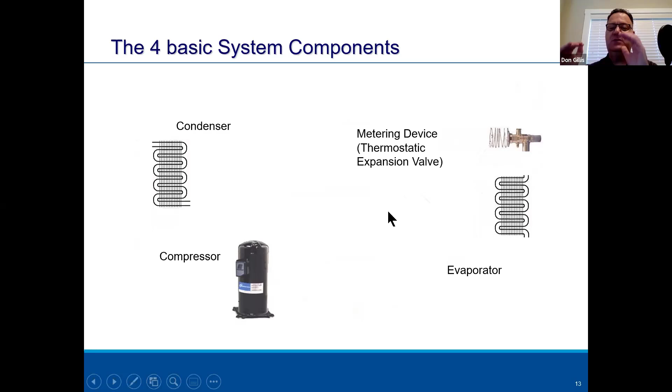And that's the way I like to look at the TXV. It's actually stopping that pressure drop, pushing back on the compressor, and it's able to balance, keep that pressure up for us to change the state, okay?

Now, this is the way I was taught years ago. I stole this off of the internet, but you can find this anywhere. I did this for a fun fact recently, and I got a lot of positive feedback, they never heard of it, even from instructors. But 7 years ago, my first vocational school, this is the way my trainer taught us. He made it a sports analogy. I like to do sports analogies. In this case, I'm going to use the baseball sports analogy, okay?

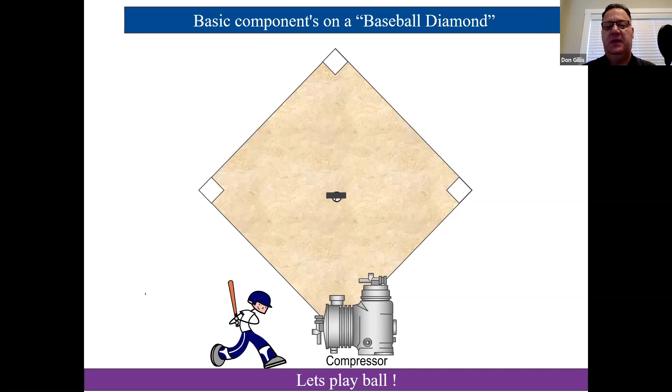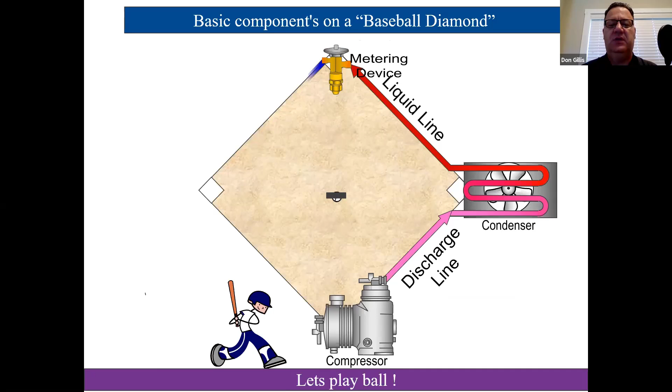And what he said was, Don, when you're out in the system, no matter how large it is, first of all, identify those four components and think of it as a baseball diamond. His name was Jeff, and he said, think of the home plate as a compressor and think of the first base as a condenser. And as you round first base and head for second base, think of that as a metering device. And when you round third, think of that as the evaporator, and then you're coming on home.

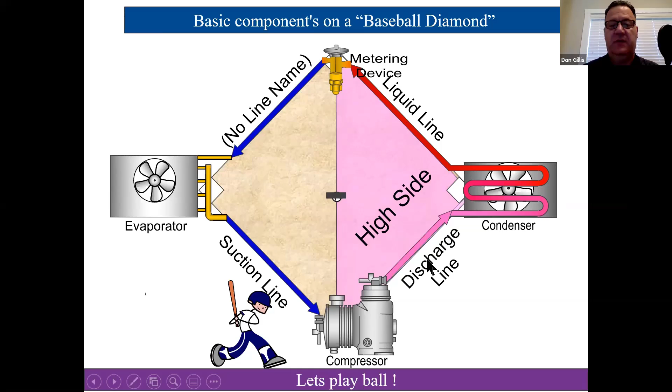But what he was really trying to tell me is not only what's inside that line, high pressure vapor, high pressure liquid, low pressure liquid, and low pressure vapor. What he really was telling me is, on this side of that pitcher's mound, over by the first base, everything over there is high pressure, whether it's liquid or vapor. On the other side, whether it's liquid or vapor, it's low pressure.

Okay, so that's a nice way for young men, young women coming out of the vocational schools or maybe on the job training to get a good visual of what's going on. And you can use any sport for this. I just chose the baseball field.

The thing I want to add here that this doesn't have, if you were to draw an imaginary line from third base or the evaporator to first base or the condenser, above that pitcher's mound everything would be liquid and everything below it would be vapor, whether it's high pressure or low pressure. This wasn't in our books when I first hired in, and they added the baseball diamond theory after because they thought it was a great way to teach.

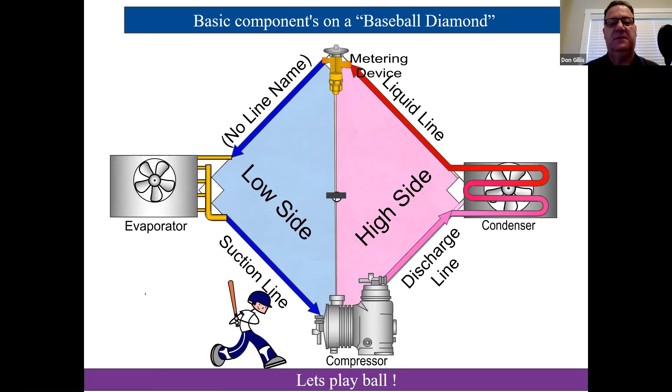So let's talk about refrigerant fundamentals. Refrigerant is a chemical compound which is capable of changing its state from liquid, vapor, and liquid while maintaining a chemical stability. And that's a fancy way of saying all day, every day, in some cases 365 days a year, we're going from liquid, vapor, back and forth, okay?

Now, the reason I want to point that out to you, unlike a car that has motor oil that you need to change every 3,000, 5,000 miles, in a perfect world, which we know it's not, you should never have to touch that refrigerant again. It's not until Don or someone like me comes up and puts long hoses on it or exposes it to air or contaminates it that we have trouble, okay? So that's the thing about refrigerants.

They don't just pluck them out of the sky. Really, almost all liquids on the face of the earth are refrigerant. Water is a refrigerant. It actually has a number. It's referred to as R718, and we use it in boilers and chillers and those kind of things.

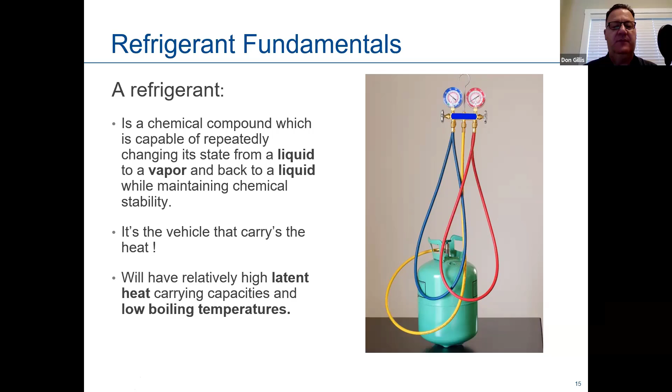And then last but not least, we need a relatively high latent heat. Now, if you were to Google latent, okay, you would see the word hidden. It's hidden heat, okay? And then we have a very low boiling temperature. For example, water boils at 212 degrees at atmospheric pressure, okay? But it has to have those two capabilities.

And this is a nice little graph. I know it's busy. I know it looks complex, but I'm going to try to do my best to give an analogy here that I use in classroom every time I teach this. And this is for beginners, the first 2-year students type things. So it's first of all, sensible heat. And these are important things to know in the field, because even though I'm going to talk about water and a pot of boiling water on your stove, it's the basics of what we do every day in the field, okay? It is your air conditioner, okay?

Sensible heat, first of all, it's just like it says. It senses. You can sense it. You can feel a difference in heat. Your thermostat senses sensible heat. You have it set for 70. It goes to 71. It senses that and it turns on. Okay. On the other hand, latent is heat that stays the same. It doesn't change temperature, but it's changing state.

And my example here is, if you were to put a pot of water on your stove tonight, and I used to do this all the time with my kids or my wife when I learned something, I'd say, hey, check this out. So I often tell our students, go home tonight, put a pot of water on your stove and start boiling it, and put a temperature probe in it. When that water starts to boil at atmospheric pressure, which is 14.7, by the way, it's standard atmospheric pressure, unless you go to Denver and they let you know about it right away. But water will start to boil at 212 degrees.

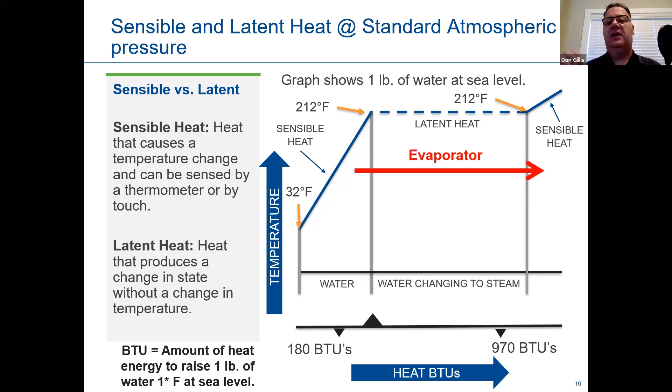What's cool about latent heat, and I'm a geek, is as long as there's water in that pot, it'll stay 212 degrees. It's amazing. It's physics, but it's kind of cool if you think about it. And that's what we refer to as latent heat, okay? That also is our evaporator. The second that last drop of water leaves that pot and it's all vapor, it'll go to 213 degrees. And right beyond that last arrow, that 213 degrees is what's leaving the evaporator. That's also known as 1 degree of superheat, okay? It's 1 degree of sensible heat and 1 degree of superheat. And I know that's not a lot of fun, but it's a nice way to look at our industry.

And going back the other way is the condenser. So in the condenser and the evaporator, we're changing state of the refrigerant. In the evaporator, we're going from liquid to vapor. In the condenser, we're going from vapor to liquid, okay? And that's what it's doing. The outside's going from vapor to liquid. The inside's going from liquid to vapor. The evaporator is absorbing the heat. The condenser is rejecting it outside, your air conditioner, okay?

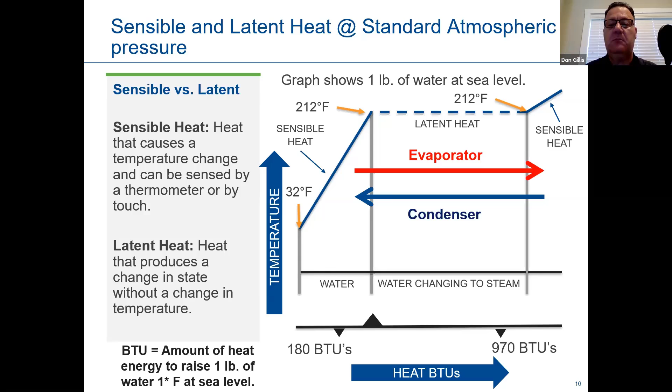So the only thing I want you to take away from this is refrigerant piping. The two biggest reasons we have refrigerant piping, the easiest way to remember this, for me, when I first got started, the two biggest ones that you need to know are the V's. The two V's, as in Victor, okay? We need volume and we need velocity, okay?

So in other words, if one of your employees or coworkers or customers goes out to hook up a refrigerant line and you just sold them a condenser, if those refrigerant lines aren't right, something's going to go seriously wrong. We need volume. In other words, we need the refrigerant line to be big enough to bring back refrigerant to cool our compressor. Remember, I said most compressors out there are refrigerant cooled. 90% of them are. Okay, so we need it to be large enough for volume to cool the compressor.

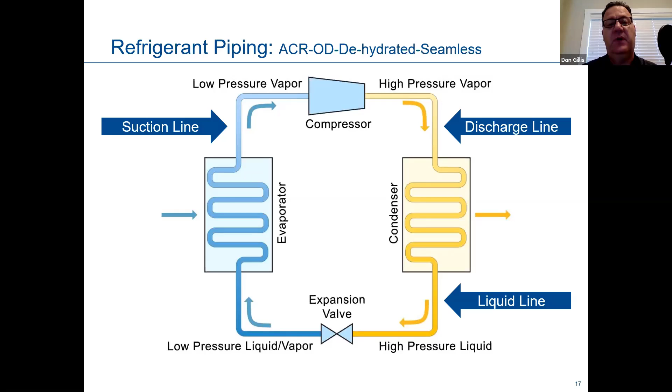We need it to be small enough to push the oil back for that velocity. Okay, so those are the two biggest reasons we size refrigerant lines like we do. And if you work for a wholesaler, you know that on your charts, if you get beyond a certain footage, like beyond 50 feet or 70 feet or something, those sizes might change because now we've got further to go.

This is just a real quick one. I don't want to scare you here on it, and I don't know everybody's level and who all does what, but I like showing this in the classroom. Just to start getting people to understand this, I always want people to be able to improve themselves and move up the ladder, and hopefully one day become that service manager or that lead technician or whatever. So this is an enthalpy chart. I'm not going to spend a lot of time on it, but when I showed it the first time, I saw a lot of eyes open from technicians, and sometimes they come in the room like they know it all already, and it really helps break down that barrier because they don't know this.

But this is an enthalpy chart, and this is what people that design systems do. Now, I don't want to teach you enthalpy, but if you ever see a diagram like this, I want you to understand how simple this is, okay? In this particular diagram, I put the compressor and the actual symbols in there. This line normally wouldn't say compressor, but this line is showing you the compressor. The line going across here is the condenser, the line going down is the metering device, and the line going across is the evaporator.

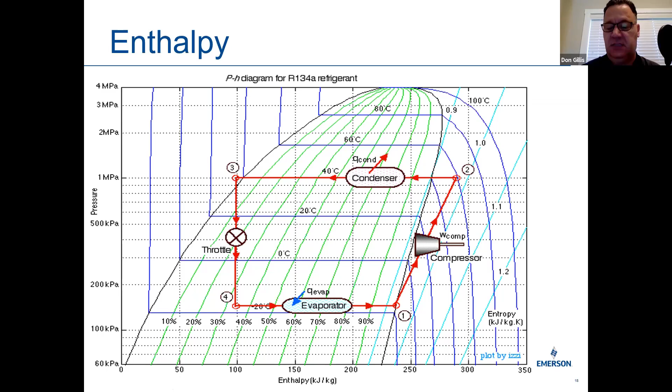Real quick, this is called a saturated curve inside here. In very simple terms, everything that's inside that thumbnail looking thing is refrigerant mixed with liquid and vapor, okay? And that's what's in our condensers and our evaporator. It's saturated refrigerant, changing from liquid to vapor or vice versa. So as long as it's inside there, it is saturated. It gets over here, it's liquid. It gets over here, it's vapor. At the bottom, we have BTUs, and at the side, we have pressures. That's how people design the equipment you work on, whether it's Trane, Goodman, whatever it is.

Okay, real quick, I didn't realize I left this in here. What is sensible heat? It's heat you can measure. Any heat that you can measure or sense, it's sensible, okay? What is standard atmospheric pressure? 14.7, okay? That's the pressure that's already pushing down on us. When our gauges are at 0 on our refrigerants, that 14.7 is already figured in, okay?

All right, what type of piping do we use? We use ACR pipe, air conditioning refrigerant pipe. The reason that's important for technicians to know is it's not like plumber's pipe. Air conditioning pipe is dehydrated, it doesn't have a seam, and it's measured by OD and not ID, okay? The evaporator refrigerant state is saturated, as I talked about, and the refrigerant number for water happens to be R718. ACR piping is different than plumbing copper; name just 2 differences. Refrigerant copper is dehydrated, it's seamless, and it's measured in OD.

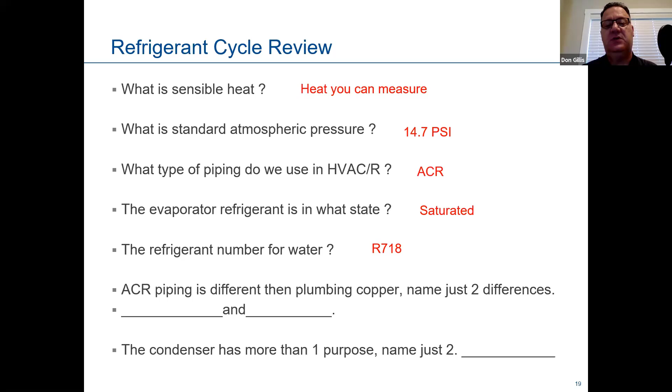The condenser has more than one purpose. Name just 2. Well, it's rejecting heat, and it's condensing the refrigerant. In other words, when it rejects the heat, it's causing it to condense, and it goes from a vapor to a liquid, okay? Let's go over some of the best practices on refrigerant. The way I put this together is it's going to be somewhat walking us through an install.

So if you already work with technicians, or you sell to technicians, or you manage technicians, or whatever that looks like, when they're going down to put an air conditioner in, this kind of looks like what their day looks like, okay? A little bit, all right?

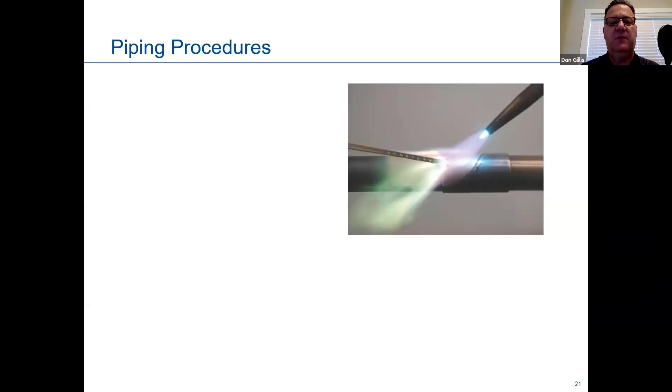So let's go over the piping procedures. They're brazing the unit in. We need the correct size of the piping, obviously. We talked about the type of tubing already. They've got to cut with the proper tools. We're talking about tubing cutters. We're not talking about hacksaws or Sawzalls. And I know that sounds funny, but you'd be surprised. And I make a joke of that because we're all guilty of it, okay? We want to make sure those little copper flakes don't fall down into the copper tubing.

Okay, clean and flux as needed. We need to clean the copper. Flux is just a salve, if you will. The only thing I tell the students about flux is it almost looks like Vaseline. It helps it seal better. It's got some solder already in it, typically, and it brings heat quicker to that area and helps the brazing go a lot smoother. The only thing I warn them about flux is it's acidic. So we always tell them to use it sparingly and put it on the male fitting, and don't glob it up in the female fitting where you can shove it down the line, okay?

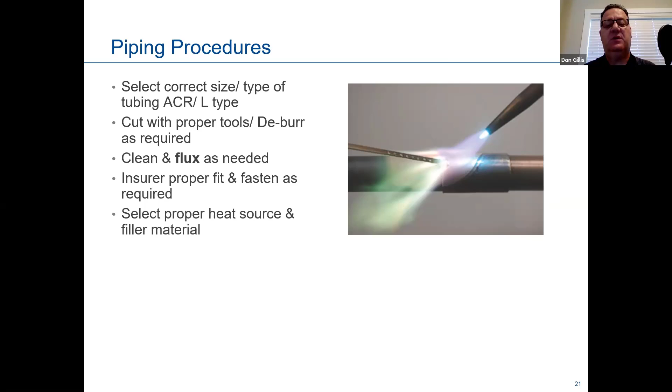Ensure proper fit and fasten as required. Obviously, follow all codes and regulations, okay? Select the proper heat source and filler material. When we talk about heat source, we've got the Turbotorches, and I know that's a brand name. They're a one-tank deal. They don't get as hot as oxy-acetylene. So you have to be very aware of technicians not staying on the part too long, because that's how new things get burned up or broke real quick, and you think it came bad from the factory when in fact it did not. And I'm talking about TXVs, service valves. That brass likes to expand because of that heat, like anything else, okay? So when it expands, you might not be able to open that valve anymore, that TXV might not be able to work.

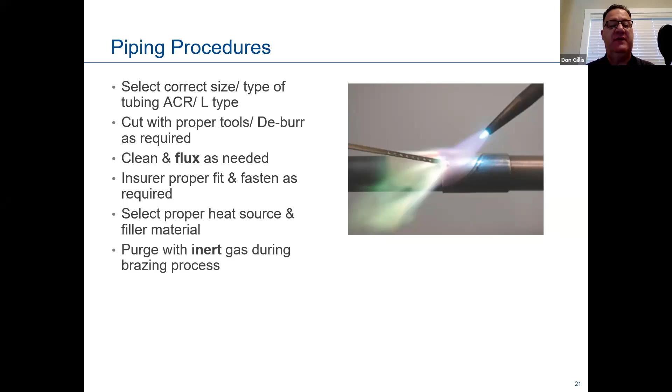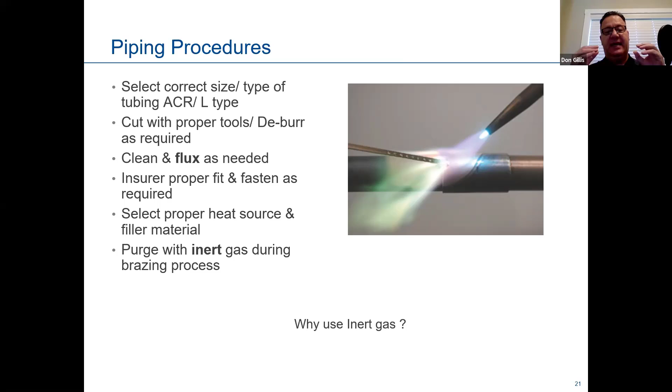Purge with inert gas. This is always a good one because a lot of guys and gals don't even realize this. And inert gas is just a fancy way of saying nitrogen. Anything that can dry the system out. We're going to put inert gas in there. Why use inert gas? As I just said, we're dehydrating it. There's moisture in there. Moisture is bad for refrigerant, especially POE oil. It turns acidic. So we have to be careful about it. We need to dry it out.

Now, what does brazing with nitrogen look like? Because a lot of technicians don't do it, more are getting used to it, but you really need to get in the practice of it. When you braze the line set into your refrigerant lines, you remove the Schrader valves from the condenser or your air conditioner. Refrigerant hasn't been released yet. And then you just open up a nitrogen tank with the hoses while you're brazing, just a little bit at a time, maybe a pound, pound and a half, if that, okay? So you're just basically not letting that oxidize inside that copper.

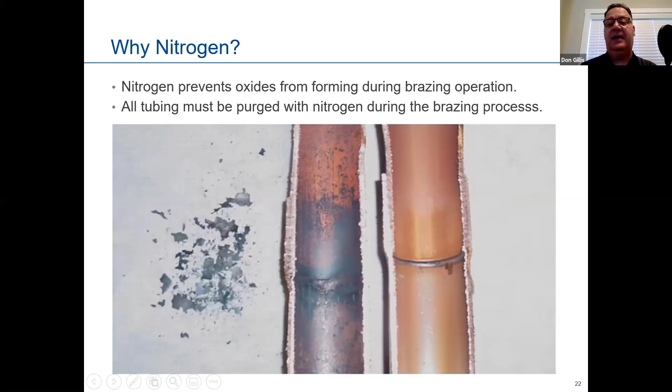And the homeowner or the building owner goes, gosh, they just don't make things like they used to, after he tells them the compressor failed or the TXV failed. Well, the fact is they do still make things fairly good, really good. It's just some of our practices have changed. And POE oil really, really changed the industry. And that's about all that's in refrigerant now, okay? When 410A came along, POE oil took over.

Okay, just real quick on pressure tests. We're pressure testing the system, and I'm not going to bore you with all this. We never want them to go above the nameplate on their evaporator to explode it, obviously. I'm not sure if you're familiar. I'm sure most of you are. We're going to use soap bubbles. Literally, it's identical to dish soap that you use. I've used dish soap before.

You mix it with water, about a 1-to-3 ratio, and you can put those soap bubbles on. It makes it thick over the fittings, which you just brazed. You pressurize that system with nitrogen, and it'll blow bubbles out wherever you might have a leak. So that's just a good visual of what they're doing when they first install the system. At the bottom, you also see some other types of detectors. One's based on sound, and the other one is a sniffer that can actually smell the refrigerant and starts beeping, almost like a CO detector in your house.

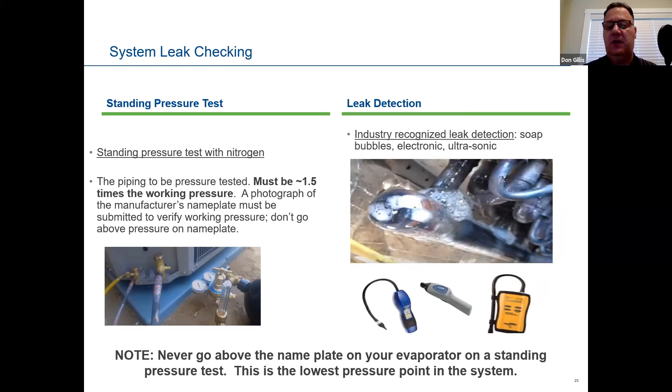Evacuation, we're going to use an evacuation pump. The biggest takeaway I want to give you there is we use evacuation to remove non-condensables and moisture. And when I say moisture, that vacuum pump is vacuuming, bringing that pressure down. It's not 14.7 anymore in those refrigerant lines where water boils at 212 degrees. We're pulling it down. For example, we like to get things down to 500 microns. That's a fancy way of saying like a -30 on your gauges, okay? And at 500 microns, you're boiling water at -12.

I did a little display the other day on my fun facts, I put it on LinkedIn too, and it got a lot of hits. All we were doing when I was teaching in Pennsylvania last week is vacuuming. We were hooked up to a mason jar of water with the vacuum pump, and it showed the water just boiling in there. And it definitely wasn't 212 degrees. You could touch the jar, but anytime you're pulling that down to a different pressure, water's going to boil

at a different temperature. Just like out in Boulder, Colorado, or Denver, Colorado. I go out there quite a bit. I was there 3 times in 2 months, and they were quick to tell me that atmospheric pressure is not 14.7 there. It's 12.2, I believe.

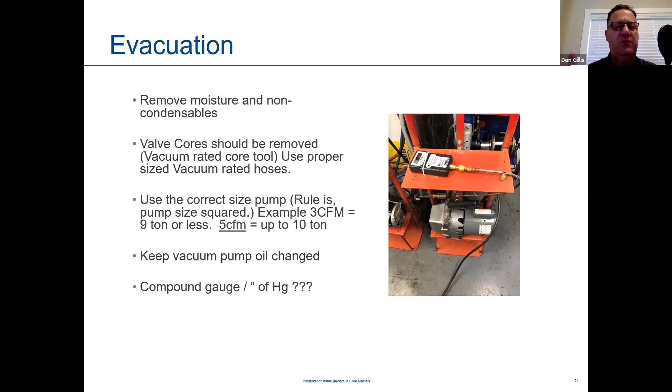Okay. The big one here that I want to talk about most importantly is change your vacuum pump oil. If you work with technicians, or you sell to technicians, or you supervise technicians, make sure they're changing their vacuum pump oil often, preferably every time. The vacuum pump oil will absorb the moisture that's coming through there. Like I jokingly say in the class all the time, don't be like Don. And this has happened to me, I'm just being honest. Don't be like Don and only change your oil when the vacuum pump tips over in your truck. Or if it's milky white, that's way too far.

You can have the best vacuum pump in the world, and within a month, it won't be pulling down worth a darn because you haven't changed the oil. So I'm not going to share with you about the different sizing. More importantly, change the oil. And last but not least, use a micron gauge. Mercury gauges or compound gauges or refrigerant gauges are not designed to pull down to a proper vacuum. They're 1/4-inch hoses. It does not work. They're not designed.

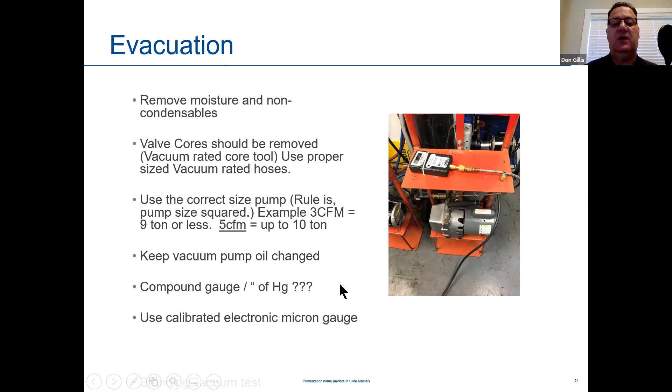You can have a 7 CFM vacuum pump, a nice fancy 10 CFM, and through 1/4-inch hoses, you're only really pulling down like 3 CFM. So it takes forever, and time is money. Okay. So get you some micron gauges and get you some micron hoses. Okay. Encourage that. This is just a nice snapshot of the gauges.

Did you know? Every one of those hash marks on these refrigerant gauges, these compound gauges or mercury gauges, is 2 inches. The reason I'm sharing that with you, did you know? Because I did not. Between every one of those hash marks is not only 2 inches, but it's also 50,800 microns. Why is that important? Why is that an eye opener to technicians when we teach?

Because close doesn't count. In between one of those hash marks, if it's beer 30 on Friday or lunchtime, or I got to go call my girlfriend or my boyfriend or whatever. Getting close does not count, because if you're off just half of a hash mark, you've got 25,400 microns. And what did we say we want? What Emerson recommends? 500 microns or less. If you are not there, you're not tight and you're not dry. Use calibrated gauges.

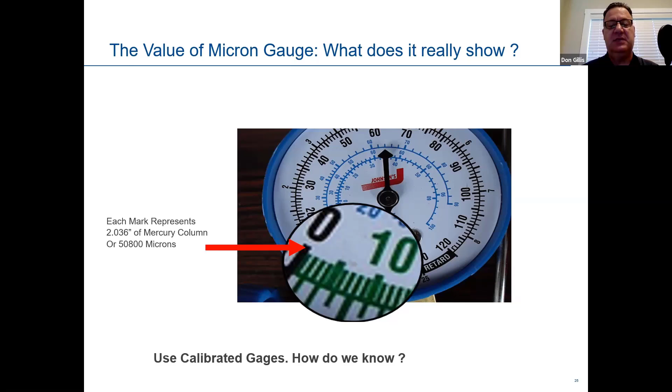Refrigerant charging. If you're using a blend, which most refrigerants out there are a blend, we ask you to turn the tank upside down. So in other words, where the Schrader valve is on top of the tank, it will be down. Why is that important to know? Because we charge in a liquid. Blends might have 2 or more components. It's like a recipe, if you will. It's like you're making chili or soup, so you're putting all these ingredients in. That's what a blend is. It has 4 or 5 components, different refrigerants to make one refrigerant.

So we want to put that in a liquid state, turning the tank upside down, because if we put it in vapor state, we have a great possibility of getting a pocket of this vapor and this vapor, and it's not a good mix. So whenever we're using a blend, we put it in the liquid side. The unit's not running now. We charge the unit. We haven't released the refrigerant in your condenser at your house. Brand new system for Mrs. Jones. The valves are still closed.

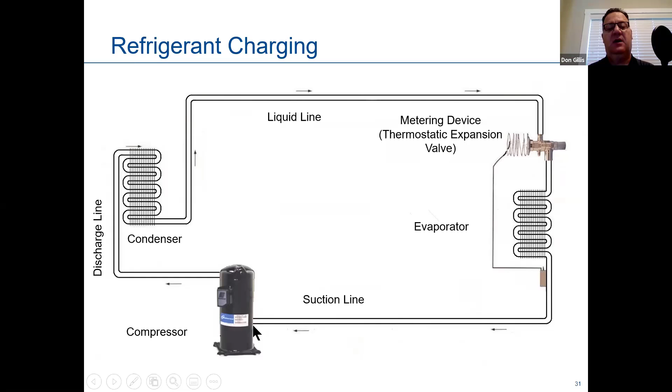Typically, and I say typically because nothing's set in stone, your air conditioner at your house, when you first get it, comes with about 15 foot of charge in it. So if this line set is longer than 15 foot, a technician should and will charge the system with a little bit more. It might only need a pound or so, but we're putting that in a liquid state, coming in the liquid line side, and we're weighing that in with the tank upside down like this. Best practices, again, initial charge, liquid, high side.

Topping off: if it is a single component like R22, you can top off that with vapor. Again, remove blends from the cylinder as a liquid. Use charging charts. When we're talking about charging charts, we're talking about PT charts. But if you don't know this, your gauges are PT charts. Those numbers in there, that's what the temperature is inside the evaporator or the condenser. It's just matching the pressure with the temperature.

My most important thing that I preach is verify airflow across the evaporator and the condenser. If you go out to your air conditioner and you see a bunch of grass clippings or tall grass or ornamental grass growing up around it, that is terribly bad on your air conditioner. It has to breathe. Remember, it's pulling air in from the side and rejecting that heat at the top. The further away you can keep anything around there, including your house, the better that thing will breathe.

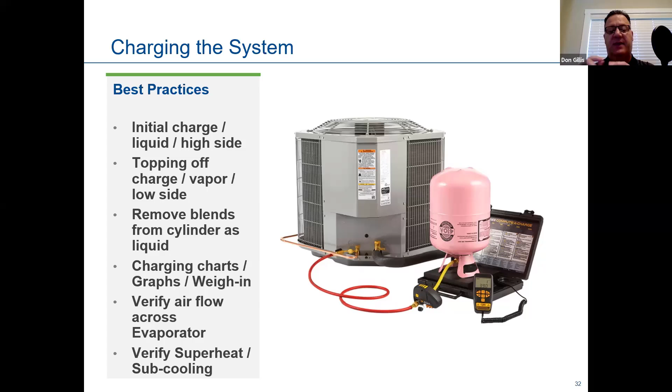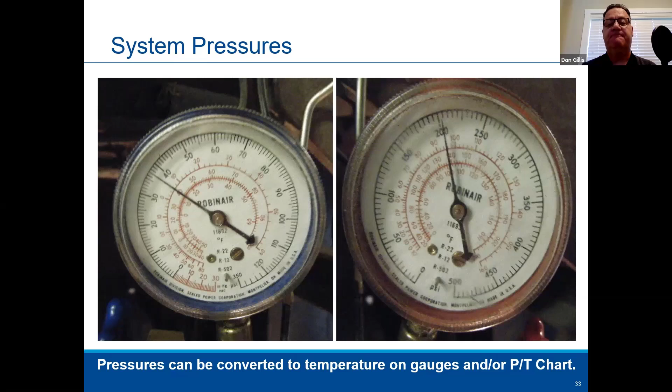Vapor or superheat, by the way, is any vapor above its boiling point. So for the example of water at 212, any heat added to a vapor above its boiling point, in water's case, that would be 213. That's 1 degree of superheat. Anything below its boiling point, 211 in water, is subcooling. So if you're drinking a bottle of water right now, that's subcooled liquid, because at atmospheric pressure, water boils at 212. So anything below 212 is considered subcooled liquid, all right? This just shows you the PT chart. This is one of our apps here, okay?

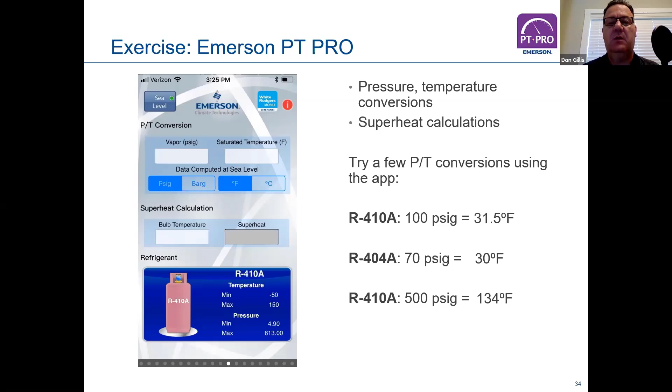All right, we have 3 different refrigerant conditions in a system. We have saturated, hopefully you remember what that is. It's vapor and liquid mixed, okay? It's both, all right? Where would we find saturated refrigerant? We'd find them in our coils, okay? Evaporator inside and the condenser outside at the air conditioner, okay?

Superheated refrigerant, that's any vapor above its boiling point, heat added to it, okay? So I always use water as the example because it's a good analogy, and it's 213 degrees. So that's 1 degree of sensible heat. It's also 1 degree of superheat. Subcooled is always heat removed from a liquid below its boiling point. In the case of water, or R718, it'd be 211 degrees, okay?

Now, which one of those refrigerants do you think transfers heat better? Is it liquid or vapor? And typically at this time in the morning, I get people kind of hesitant because no one's talking yet. And then finally, what is it, vapor or liquid? And you might get 1 or 2 or 3 hands go up, more of them and more of them. Okay, let's do it this way. How many people think it's vapor? And you'll get, let's say it's a class of 24, 10 of them saying it's vapor, and 14 of them saying it's liquid. And then I give them a visual.

The way I was taught, the best analogy I've ever heard, I tell them, think about this. You have to sleep outside for 24 hours. It's 60-degree air temperature outside. You can wear whatever you want to, shirt, short sleeves, long sleeves, pants, shorts, whatever. Will you survive in 60-degree air? And the answer is yes.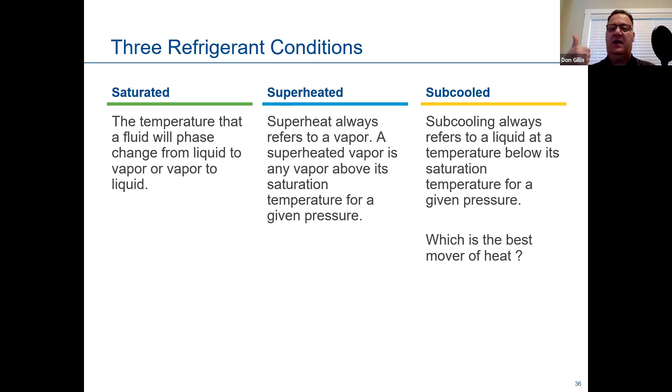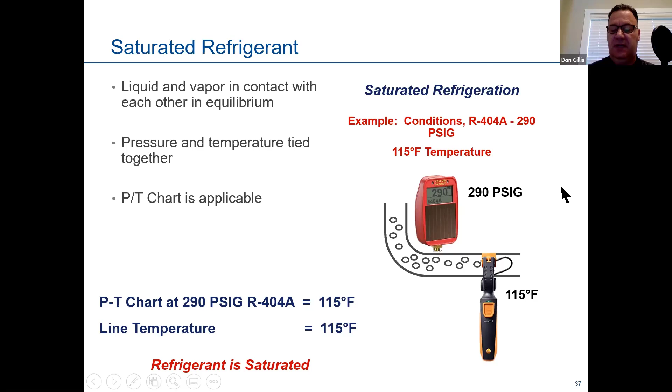The moral of this story, everything in that refrigerant line is in fact saturated, okay? Where would we find saturated refrigerant? We would find it in the evaporator and the condenser. On the evaporator, we're going from a liquid to a vapor, absorbing heat inside the house or the building. Out here, we're going from a vapor to a liquid. As we reject the heat, we're condensing that refrigerant from a vapor back to a liquid, okay?

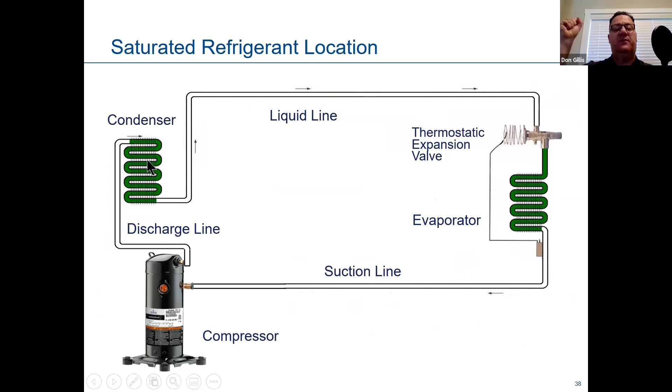Let's talk about superheat. Superheat, first and foremost, is a vapor. If they're looking for superheat anywhere else but the suction line, they're doing it wrong. And believe me, it happens all the time. When I was a service manager for 9.5 years in Fort Wayne, I trained a lot of people. I was blessed to work with a lot of good technicians, learned a lot from them, and hopefully I taught them some things.

And you'd be surprised. When I was first taught, I learned a lot, but the older guys that taught me, the age that I am now, I'd be looking over their shoulder like 26, 27 years ago, and I'd say, what should the gauges read? And they would say, well, on a temperature like today, we're looking at about 70 pounds. But to be honest with you, they weren't technically doing it correctly. They were just kind of ballparking it.

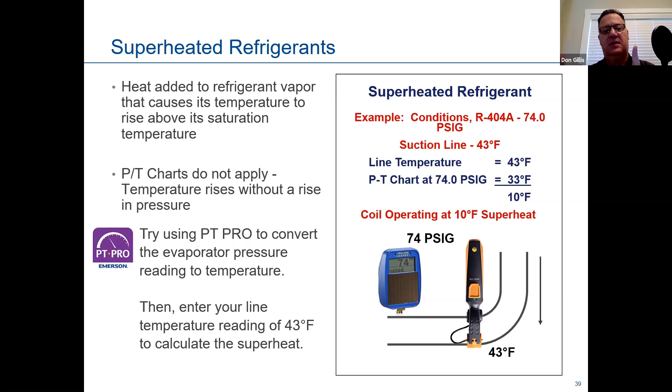But this is the right way to do it. You know what your gauges are telling you. Whatever that temperature is, just subtract whatever it's leaving, the evaporator or the condenser. So that's superheat. Now, where would we take superheat at? By the way, this is a TXV, if you didn't know that. This is our metering device. I'm sure you do. This is how this works, okay?

A TXV is metering the refrigerant as it's coming in. Remember, it's also a pressure drop. Without it, we wouldn't be able to build up pressure. Think of a little orifice, allowing so much refrigerant in. As it's coming through there, think of a spray bottle, a Windex bottle. That mist, atomized, that's what it's doing. It's changing from a liquid to a vapor, but it's mostly liquid when it leaves, and then it starts to absorb heat, and it turns to a vapor.

The real thing I want to point out is metering devices like this work so much better than a piston because there's a bulb over here reading the temperature of the refrigerant line leaving the evaporator. This is the TXV bulb. What's inside that TXV bulb? It could be any component. Sometimes it's the same refrigerant that's actually in the system.

What is it doing? When this refrigerant line gets hot, there is a pressure temperature relationship. The hotter it gets, the higher the pressure goes up. It expands that gas in that bulb. This line here has a little hole in it, and as it raises the temperature, it raises the pressure, and it pushes down on a diaphragm here. So if it's too hot leaving, it opens this TXV up more and allows more liquid refrigerant through, then it gets cool here and it adjusts all day like that, up and down. Think of it as a little diaphragm.

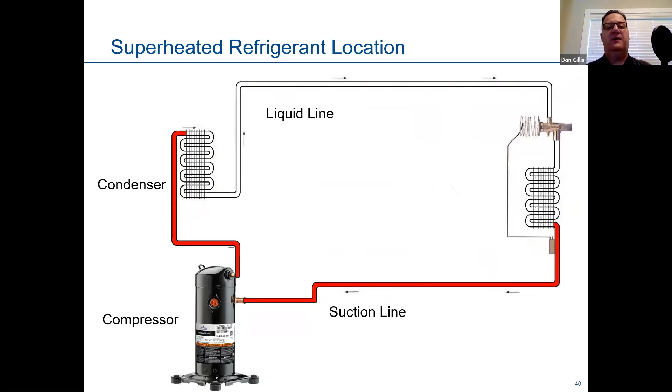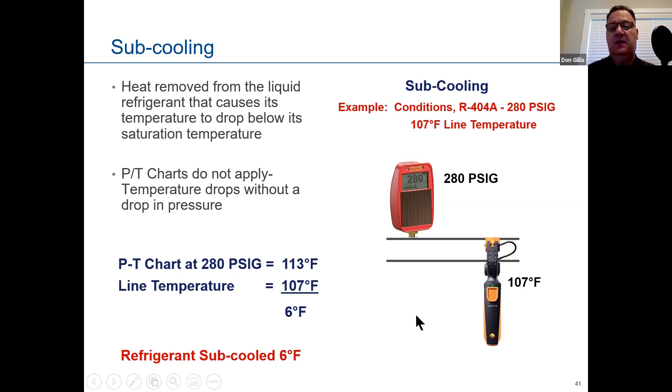The way I like to teach this is subcooling means the condenser. That's where we're changing vapor to liquid. Subcooling is a liquid, the same as superheat over here in the evaporator. So if we know the condenser is where subcooling happens, whatever our gauges say on our high side or red gauge is telling us the temperature about midpoint in that condenser. How do we do subcooling? We take the temperature leaving the condenser, subtract what's inside the condenser from our gauges, and that's our subcooling. It's that simple. If they're checking subcooling anywhere else but this line, they're doing it wrong.

And you'd be surprised. I've talked to technicians before as a service manager, and I finally say, where are you taking that temperature reading at? And I'm on the discharge line. Terminology sometimes can be confusing, whoever's training you. You have to be in the liquid line to be checking subcooling, okay?

I like to take readings here on subcooling on both ends, but I especially like to take it here also because it's as important to have liquid going into this TXV or this metering device as it is to have vapor going into our vapor pump, okay? Again, these two lines, remember home base and second base, our compressor and our TXV. That's our home plate and our second base. We have everything high side over there, low side over there, that imaginary line.

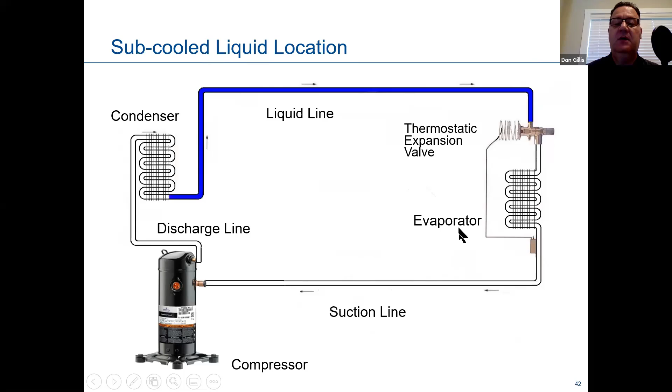So this is the final slide. I hope I didn't bore you too much. If you're taking notes, remember this. Not only is this a suction line, it is low pressure superheated vapor. The suction line equals low pressure, superheated vapor. The discharge line equals high pressure, superheated vapor.

Okay. The liquid line equals high pressure, subcooled liquid. And of course, the green, what does it identify? That's saturated refrigerant. Saturated is defined again as liquid and vapor mixed.

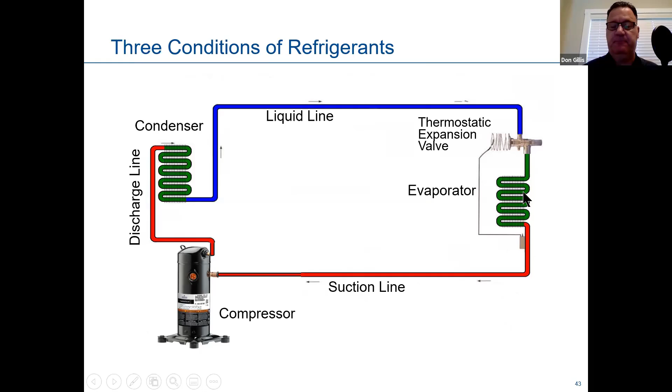All right. I hope I didn't put you to sleep. Hopefully we still have somebody on the line. It was great. Yeah, I'm pretty sure people are still here. You've been getting good feedback in the chat. Everybody has enjoyed the presentation, especially the baseball analogy earlier, and everybody wants a copy of the slides. Cool. Great. Lots of great detailed information in a short amount of time. Thank you. Great presentation. Lots of things going on in the chat for you, Don. So sometimes not having questions might be a good thing. Is there anybody that has any questions, any follow-up, any insights, something you learned, feedback? Very good presentation, Don. I really appreciated it. You bet. My pleasure. I hope you got something out of it. I tried to do my best.

Again, I know we're not going to walk out and be technicians today or tomorrow, but if you're working with people, it helps you understand things a little better. This is the way I teach all the time. I try to simplify things as best I can. Yeah, it's not what I do for work. We're on the temperature control side, thermostats and controllers for different pieces of equipment, but it was very interesting. Good. I appreciate that. Thank you.

I have a question. Sure. On the apps, it looks like you've got a ton of apps to choose from. Which would be the top one or two for the field technicians that I could tell them to look into first? So they should download Copeland Mobile. It is free. If they ask you to register, tell them not to panic. They're not going to send you a bunch of email. We do this for every class. I have them download these apps before we get started, and they actually do those drills in the classroom just to get them comfortable with it.